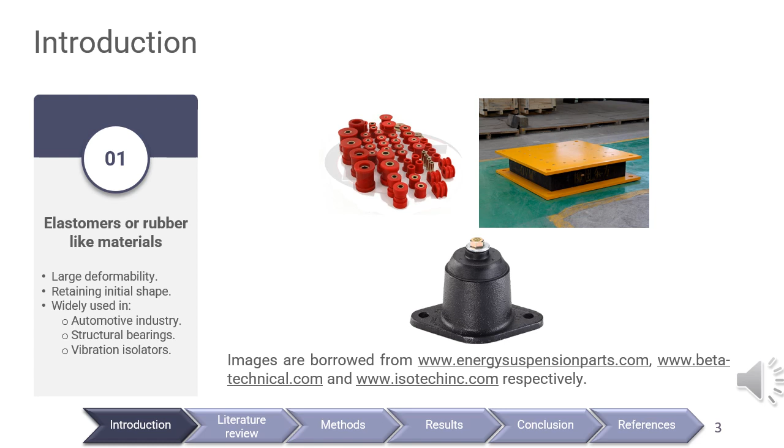On constitutive equations, since predicting nonlinear behavior of materials like elastomers has become one of the most important issues in solid mechanics, lots of constitutive equation forms have been proposed in the literature, like the Neo-Hookean or Arruda-Boyce model for hyperelastic materials, and Prony series or EXP model for visco-hyperelastic materials.

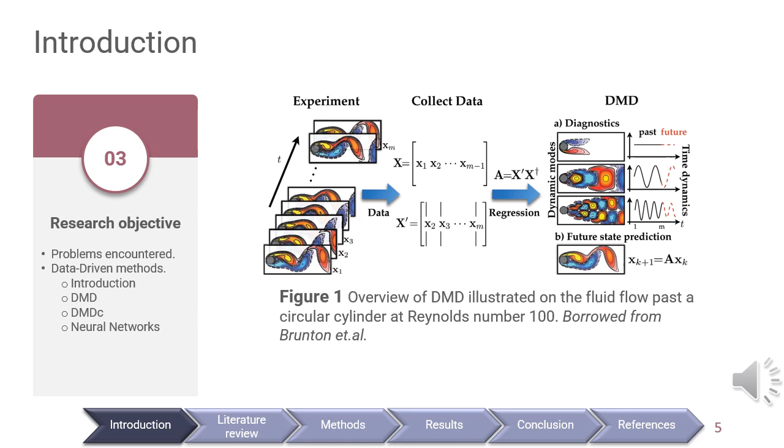And this is the last slide on introduction, and I'm going to talk about model verification. In order to examine the capability of introduced data-driven models in reproduction of the viscoelastic, hyperelastic, and visco-hyperelastic behavior, nonlinear behavior of material in general, 4 problems are presented in this paper. First one is comparing the output results from a one-dimensional viscoelastic constitutive model, which is Burgers model. I will talk about it later.

2. Predicting the behavior of a hyperelastic material subjected to uniaxial and pure shear loading based on experimental results from the book published by Treloar, and comparing the result obtained from data-driven methods with analytical results from the literature.

Comparing the results obtained from data-driven methods against the experimental results borrowed from a paper published by Lion, an analytical method presented in the literature on visco-hyperelastic behavior of materials subjected to uniaxial loadings at different rates. And the last one is reproducing the results from the experiments run by Jennifer Kadlowec and her co-workers on the behavior of elastomeric bushings under uniaxial displacement and torsion using data-driven methods.

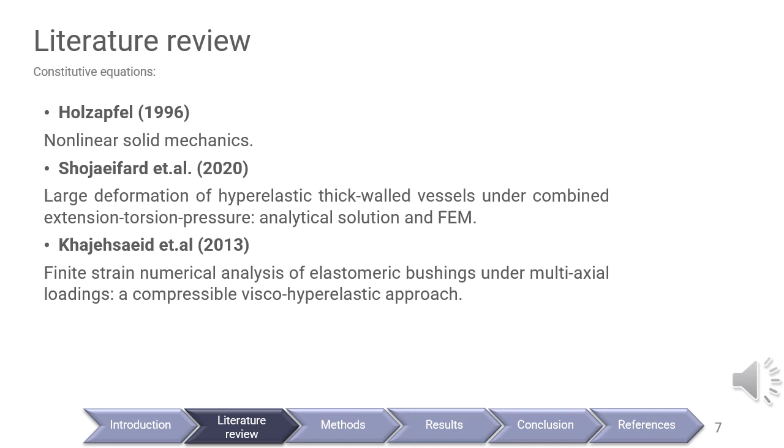DMD and DMDc algorithms have been introduced in a book published by Kutz and his colleagues known as Dynamic Mode Decomposition: Data-Driven Modeling of Complex Systems. These models apply to some problems such as an unstable system with a proportional controller stabilizing the system, and a high-dimensional stable dynamical system with exogenous forcing.

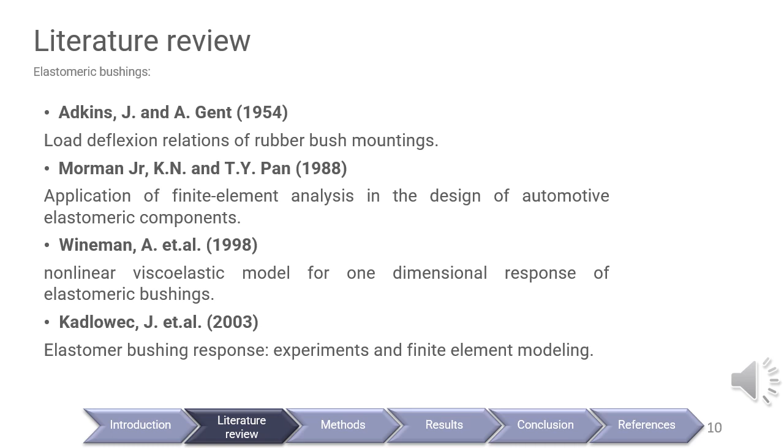And one of the most important references in this work, Kadlowec and co-workers in 2003 ran some experiments on bushings. Their experiments were performed on a set of axisymmetric mold-bonded bushings under 1 millimeter uniaxial displacement and 15 degrees torsion applied to the sleeves. A computer-controlled Instron 8511 multi-axis servo-hydraulic test machine was used to perform quasi-static and dynamic displacement control tests on the samples. They used ramp loading in both uniaxial displacement and torsion. The results were reported in two different systems: radial force related to uniaxial displacement and moment related to torsion.

It's worth mentioning that there is no limitation in this library, and one can use any terms in it. Actually, you can just use inputs, but when we use just inputs and don't use, for example, polynomial terms of inputs, the accuracy decreases, and for the sake of accuracy, we use these arbitrary libraries.

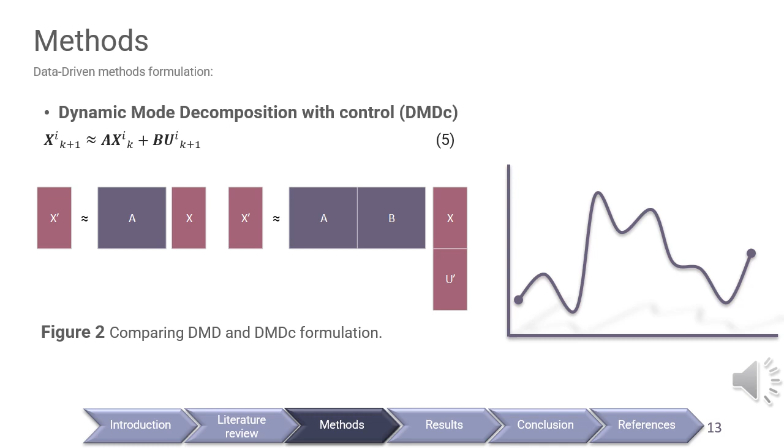Actually, here we don't have two matrices, matrix A and matrix B. Actually we have a larger matrix, and as you can see here we use X at time step K, and U at time step K plus 1. That means, for predicting the behavior of a system in the current state, we use the response of the system in the last time step and the library of inputs in the current state. So that's DMDC. Let's continue to the neural networks.

So the next slide is about neural networks. Due to significant leaps in computer science in the last decades, machine learning has become one of the most crucial topics. There are many methods in machine learning, but the primary focus of this work is on neural networks, because neural networks present a robust model that can predict a nonlinear system with great accuracy.

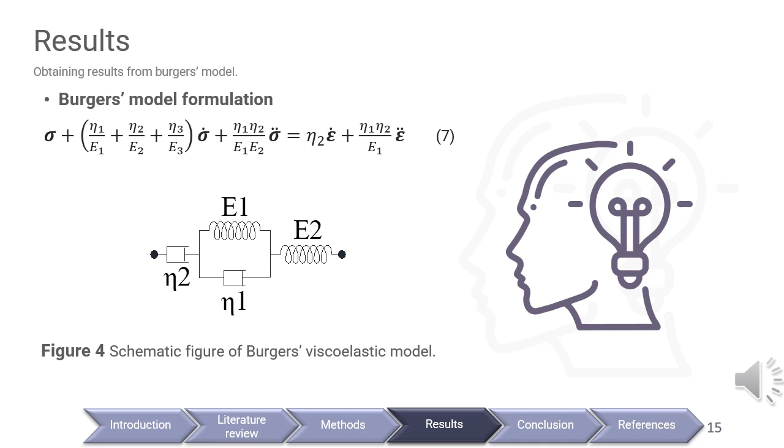By solving this problem, we actually decided to continue our work, and it turns out that these models work. Now let's see other problems we worked on in this study.

The second problem we solved is predicting the behavior of a hyperelastic material under uniaxial tension and also pure shear. In this set of problems, we use results obtained by Treloar and we compare results gained from data-driven models against four other constitutive models available in literature, which are the EXP-LN model, Arruda-Boyce model, Mooney-Rivlin model, and also EXP-EXP model. You can see the material coefficients related to these models in our paper.

In this problem, we use experimental data obtained from the uniaxial extension test to train our models, and then through a cross-validation process, we predict the behavior of the material under pure shear loading condition. In the figures, training and validating datasets are pointed out by triangles and circles respectively. As you may notice, in the case of data-driven models, there is a great accordance between experimental and predicted results.

Lastly, it's worth mentioning that in this problem, we used a single-layered feed-forward neural network, and the library in this problem consists of inputs as they are, and there are no more terms included.

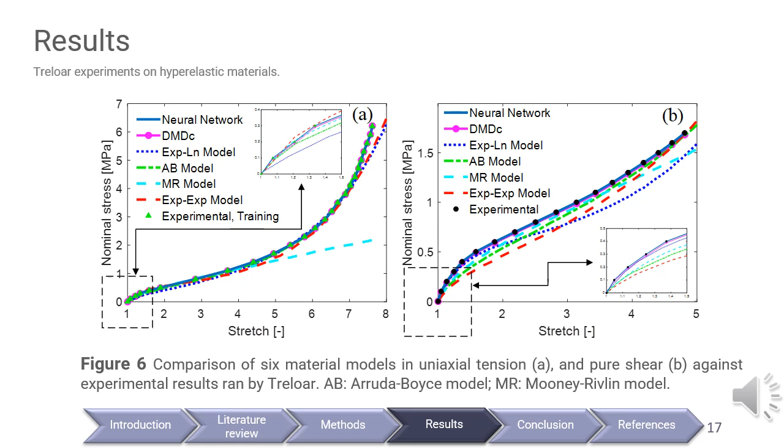Now let's talk about the next problem, which is predicting the behavior of a visco-hyperelastic material under uniaxial tension at different rates. These experiments were run by Lion. As you can see in figure 7, we break the whole dataset into two separate datasets, training dataset and validating dataset, which are pointed out by triangles and circles in the figures.

And it's worth mentioning that the U matrix here is just input terms as they are, just like the previous problem actually. And as you can see here, there is a great accordance between data-driven models and results gained from the experiments. So let's go to the next problem.

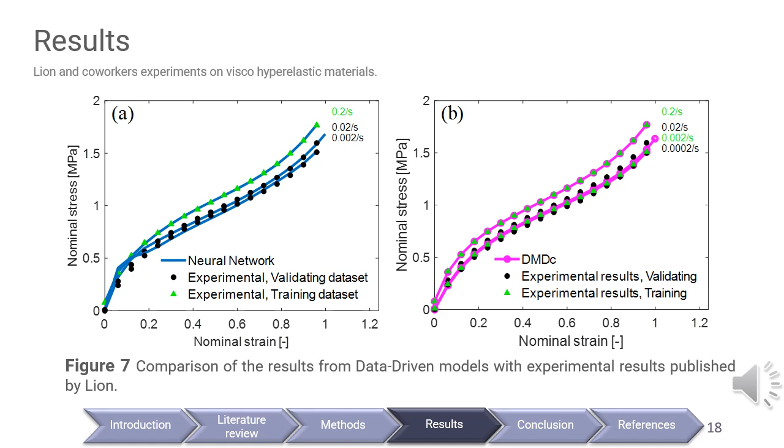In this slide, we are going to investigate the behavior of visco-hyperelastic materials in unloading situations, and also examine the ability of data-driven models in predicting the visco-hyperelastic behavior of materials under loading and unloading deformation based on experimental data published by Ghorbanoghli and his co-workers performed on a self-healing hydrogel.

Similar to the previous problem set, two different datasets are needed for training and validating. The experiment of Ghorbanoghli and his co-workers consists of two parts: loading and unloading performed at different rates. For this set of experiments, a constant loading rate of 0.3 per second and three unloading rates of 0.001, 0.01 and 0.1 per second were chosen.

In this section, models are trained on the results obtained from experiments with unloading rates 0.001 and 0.1 per second, and then through a cross-validation process, the results for the experiment with unloading rate of 0.01 per second are obtained. In this problem, the inputs are strain and stress from the previous time step.

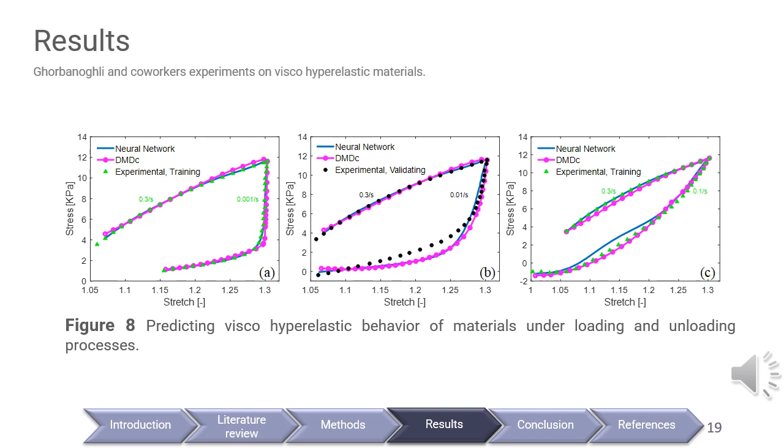The library includes these terms up to order 3, and the output is the stress in the current time step. The results are shown in the figures, and as you can see, the data-driven models can accurately predict the behavior of a visco-hyperelastic material in loading as well as unloading.

And now it's time to talk about the last and the most important set of problems we solved in this paper. In previous sections, the performance of the data-driven methods in reproduction of classic uniaxial tests under quasi-static and dynamic loading was evaluated. In this section, the main goal is to train data-driven models to predict the behavior of an elastomeric bushing based on results presented by Kadlowec and her co-workers.

The elastomeric bushing used by Kadlowec and her colleagues was made of a hollow elastomeric cylinder embedded between inner and outer steel sleeves, where its dimensions are 60 millimeters length, 18.2 millimeters outer radius, and 9.85 millimeters inner radius. As mentioned by Kadlowec, the definitive test for elastomeric bushing is step loading, but as the actual step loading is impossible, a ramp loading was chosen.

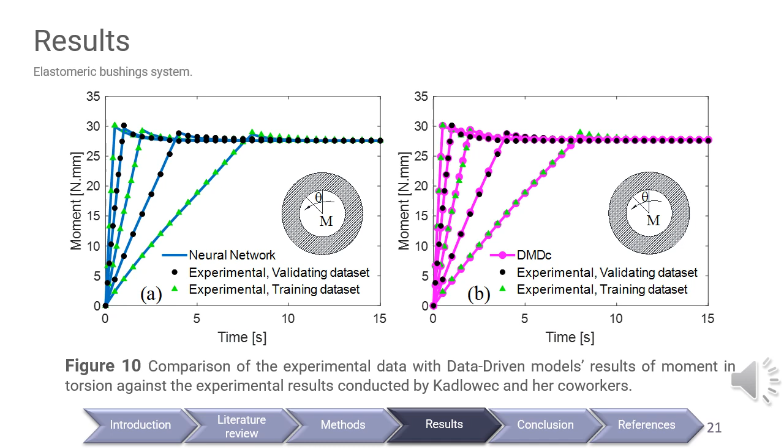As depicted in figures 9 and 10, the data-driven models, neural networks and DMDC, can predict the relaxation response of elastomeric bushing in different deformation modes. As mentioned, the maximum force or moment is a vital characteristic in the relaxation response, indicating that a model can accurately follow the loading path. As you may notice, data-driven models accurately predict the maximum radial force and moment. Furthermore, the relaxed behavior of elastomeric bushings is successfully predicted.

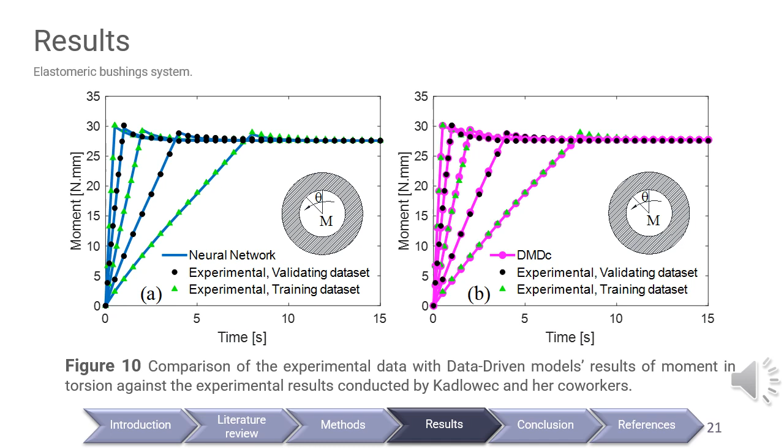In this slide, I want to answer a major question: why should we use data-driven methods? The answer can be, as the objective function is nonlinear in models related to nonlinear materials, the calibration process is a complicated, computationally expensive, and time-consuming task. While in data-driven methods, one does not face these challenges since these models are simple and they do not involve a high computational cost. Another reason to think about these models is their unbelievable speed in reaching a response that is not comparable to numerical and analytical methods.

As well as the positive aspects mentioned here, there are some limitations in these models. For example, there are some difficulties in implementing these models in FEM software such as Abaqus or COMSOL. Another limitation of these models is that they have some limitation in predicting a deformation regime that has not been present in their training dataset. And also these models require a quite rich training dataset to offer a good performance. And that's it.